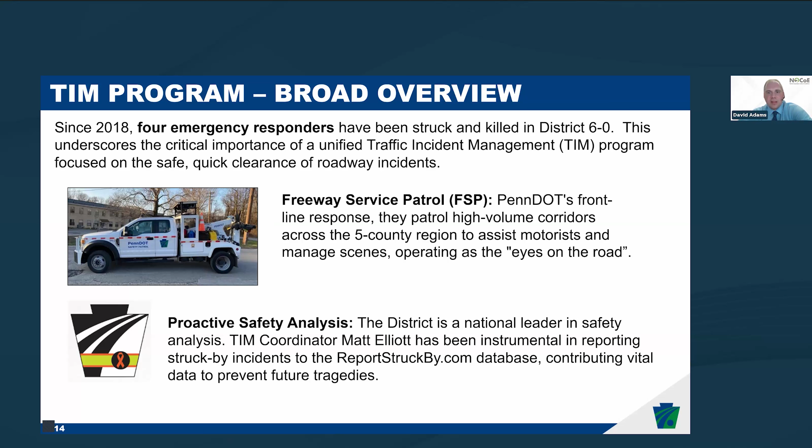In addition, it's important to us to have proactive safety analysis. We consider ourselves kind of a leader. One of the guys from our office, Matt Elliott, he's been instrumental in reporting struck-by incidents to the database in an effort to document and help prevent future tragedies. Next, please.

A few of our initiatives. We have a lot of statewide and regional collaboration, including the statewide PennTIME Committee, and then regional TIM meetings, typically done by county and led by DVRPC, which is our local MPO in the Philadelphia area. In addition, technology is important to us as well, including the HAAS technology. And then also, from a sustaining perspective statewide, having active participation and commitment from a lot of our partners. It's important for us to all work well together, and we're fortunate to have that here. Next, please.

So in terms of training, we've had 94 TIM classes. There were 3,000 responders just here in District 6 since 2019, and included also targeted training for our RTMC and freeway service patrol operators. So they're educated as well. And then a number of different technologies in use, UAS, and then also digital photogrammetry to clear crash scenes for investigations quicker.

Also public outreach, including Pennsylvania's Move Over law and distracted driving awareness through public events, and then also encouraging the 511 PA system. It's common for us to have press conferences with district leadership and our press team to get the word out there to improve highway safety. Next, please.

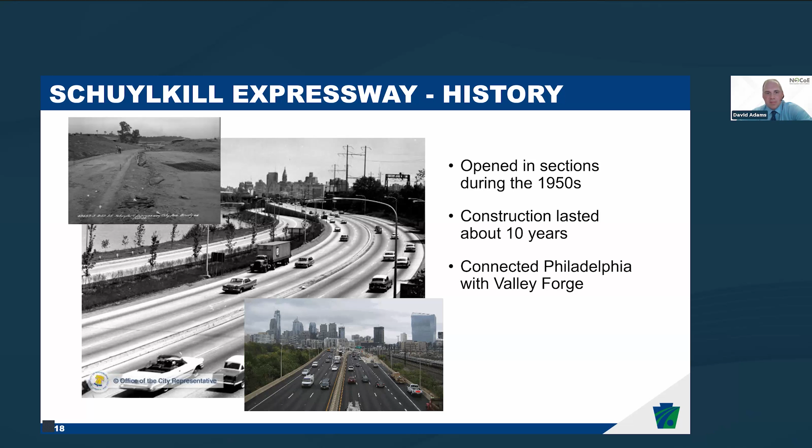So we are constrained on both sides. It's a challenging situation. You have steep cliffs on one side and the Schuylkill River on the other, which makes it very difficult for any type of expansion effort. So it ends up being a natural bottleneck.

In addition, since it was built in the 50s, the King of Prussia area has really expanded. We have the King of Prussia Mall, which is one of the largest malls in the country. It's a very big commercial center, in addition to completion of 476, which we call locally the Blue Route, along the western edge of the suburbs. So from a transportation perspective, it's a very high demand corridor, and the constraints limit our options. So we've turned to different things like ITS technologies, which we'll walk through here. Next, please.

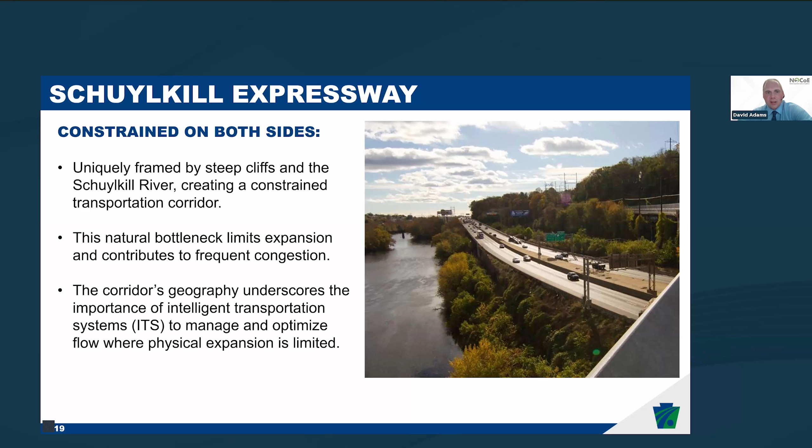We have over 500 cameras in the Philly area, plus over 200 message boards. We have a really nice room for our incident command center. So a very good place and plenty of room for expansion too in the future. Next, please.

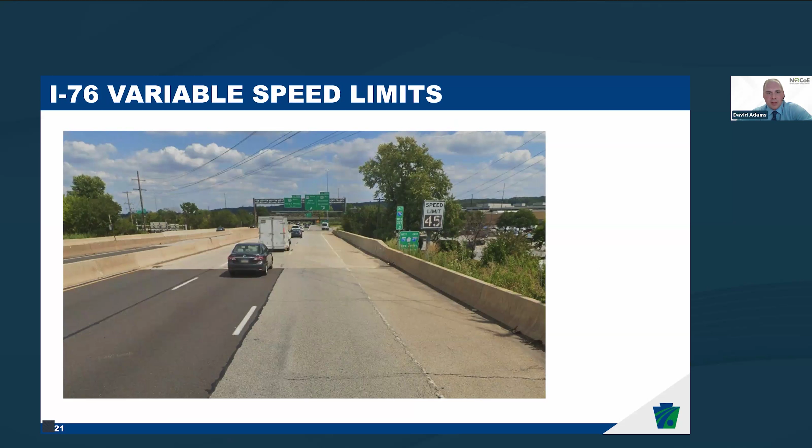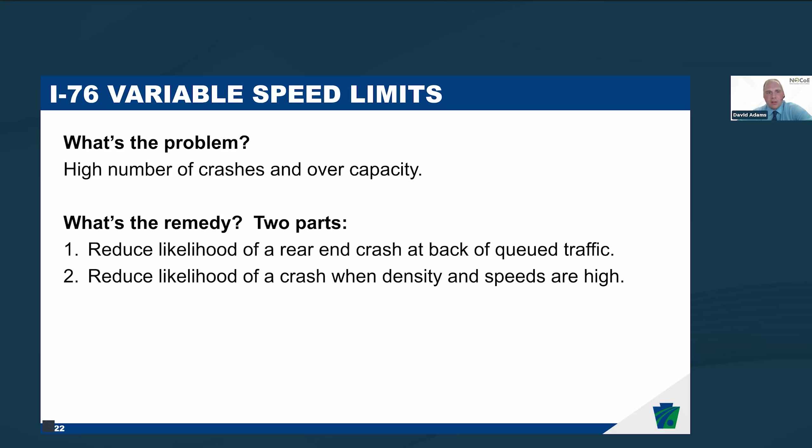So what's the problem? High number of crashes and overcapacity. So what's the remedy? In terms of variable speed limits, it's two parts. One, we wanted to reduce the likelihood of a rear-end crash at the back of the traffic queue. And two, reduce the likelihood of a crash when you have a situation with high density and very high speed, which I'll walk through. Next, please.

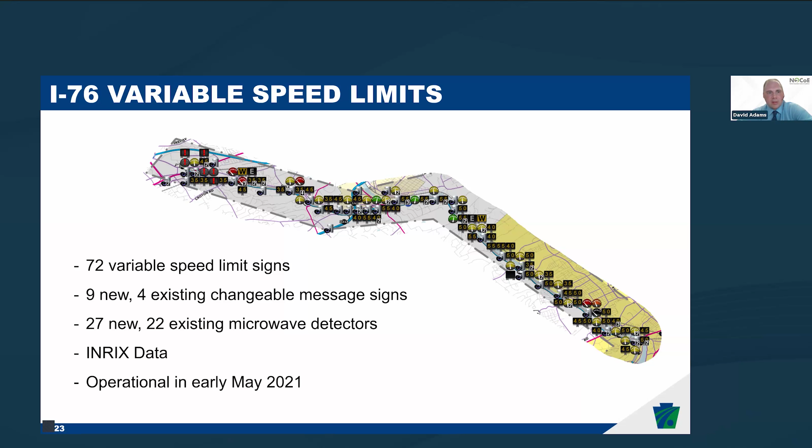So we really needed microwave detectors here, because for this type of system where we want to know exactly what's happening all the time, you have to actually have a detector out there, since there's a bit of a delay in grabbing crowdsourced data. That's why it was important to have microwave detectors instead of just relying on the crowdsourced data.

The maximum speed in Montgomery County is 55 miles per hour, and when you hit the city limits, it turns into 50 miles per hour. We don't allow more than a 10 mile per hour step drop in speed limit between variable speed limit signs. It's run fully automated. We can run it manually or semi-autonomously if we have to, but we allow it to automate 24/7.

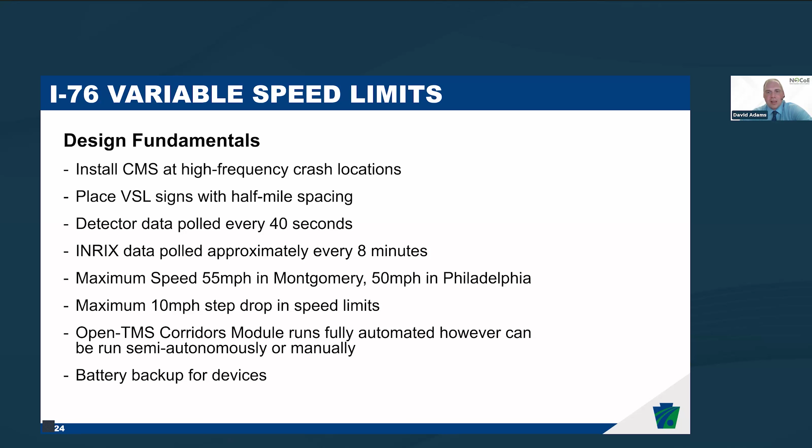One lesson learned: when you have a winter storm and want to limit the top end speed, suppose we do a speed restriction on all interstates of 45 miles per hour, you need that functionality in your system to change the ceiling speed so it fluctuates between 35 and 45 instead of 35 and 55. That was an enhancement we had to add after the fact. And we have battery backup for the devices. Next, please.

Okay, so I talked about the two ways we try to tackle this. One was high density and high speed. Studies have shown, and it's intuitive as a driver too, if you have very dense traffic at very high speeds, the likelihood of a crash greatly increases. So we use a flow crash potential index, detecting the speeds and density of traffic, to find out when we need to start dropping the speed limit based on the FCPI. So that's one component. Next, please.

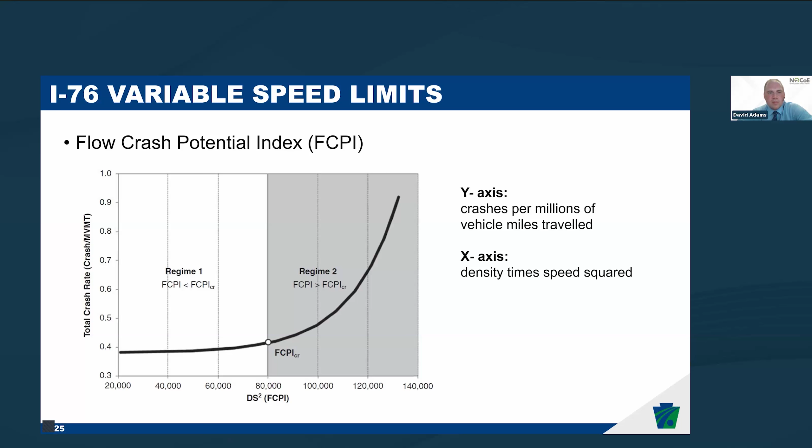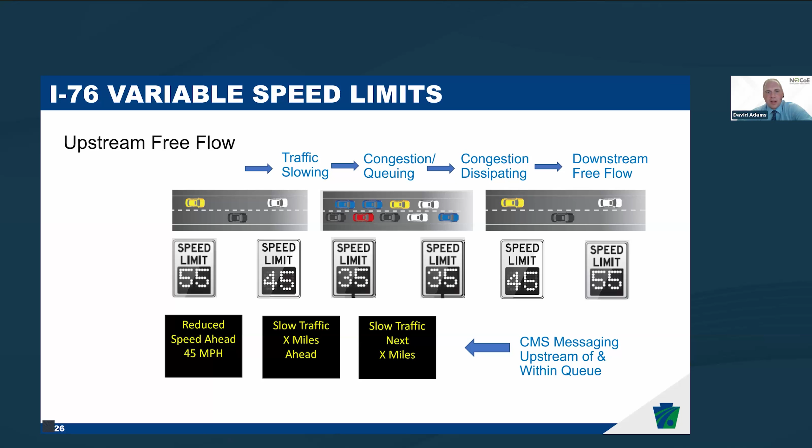So as a driver, one of the great benefits of it is when you start seeing that speed slowing down on the signs, whether it's 45 or 35, you could intuit that something's going on up ahead. Whereas if it's 55, you've got a good amount of confidence that traffic's running free flow. So that's definitely one of the benefits to the system. Next, please.

And this is just kind of an animation. You could see what it looks like on our ATMS software. We have this dashboard that'll show the data coming in terms of speeds, and then also what we're posting on every sign out in the street. And then at the bottom there, you could see a representation of speeds, traffic, whether it's yellow or red based on speeds. Next, please.

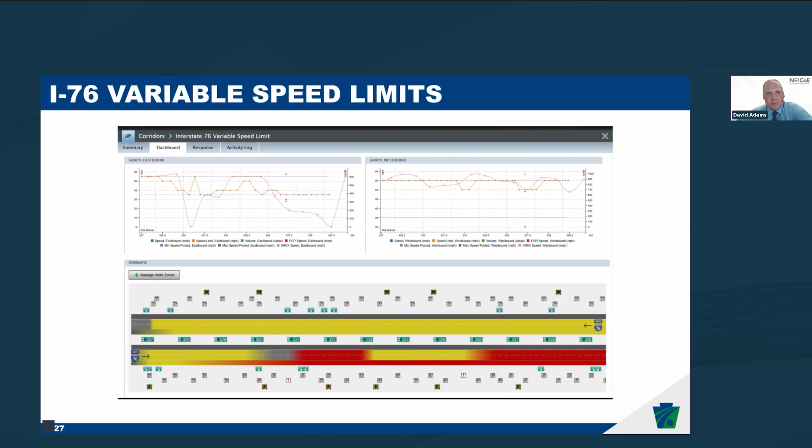So in terms of how it's performed, we went live May of '21, as I'd mentioned. There were kind of two analyses we did. One was looking at initial data in 2021 when it had turned on, because we started getting questions about how it's doing. It was too early to really give conclusions at that point because we were just looking at the data in the months after it was turned on. But we did start to see reductions month by month in crashes after it was turned on. But we definitely qualified that by saying we don't have a couple years of data yet.

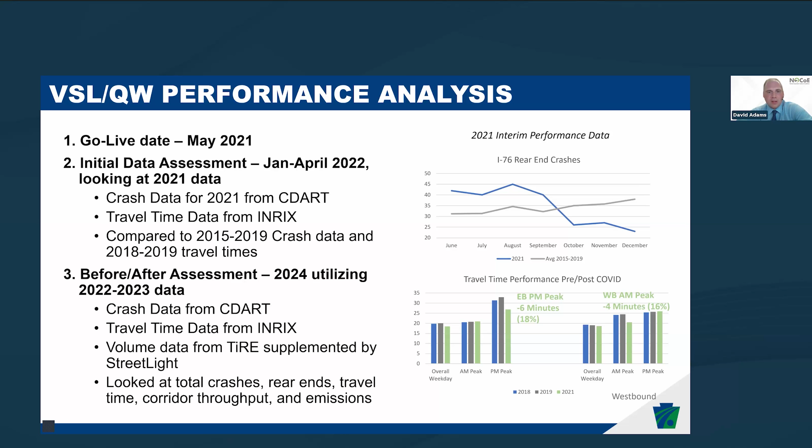But we did do an assessment in 2024. We looked at 2022 and 2023 data and compared it to pre-COVID, because we didn't want to compare it to 2020 and early 2021, when traffic patterns were definitely different because of COVID. So next, please.

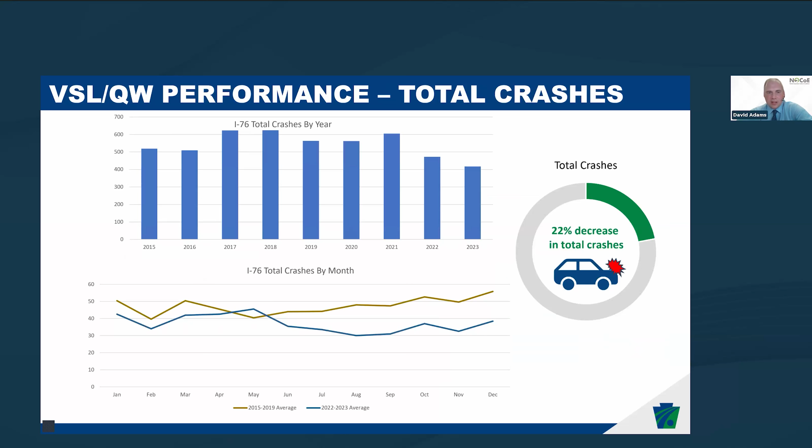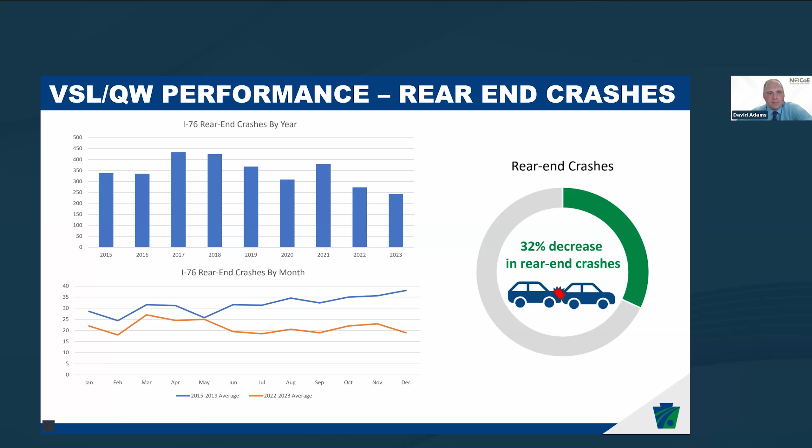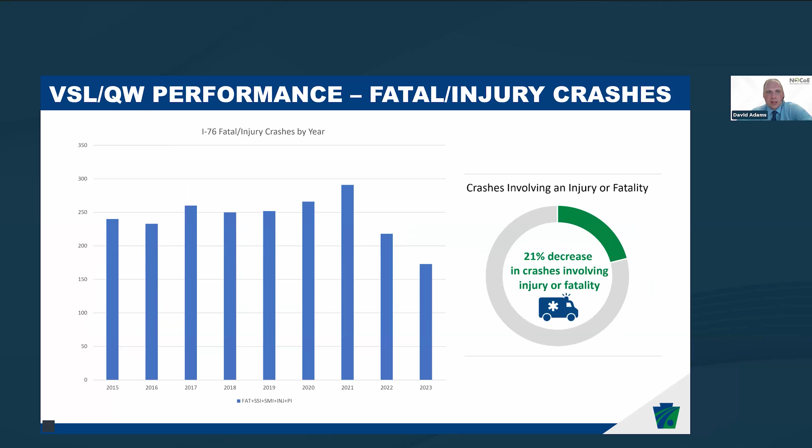So in a couple of the results, we had a 22% decrease in total crashes after the VSL was turned on in studying those 2 years versus the years prior to COVID. Next, please. And then a 32% decrease in rear end crashes. Next, please. And then a 21% decrease in crashes involving injury or fatality. These were definitely positive numbers and showed really good results for the system. Next, please.

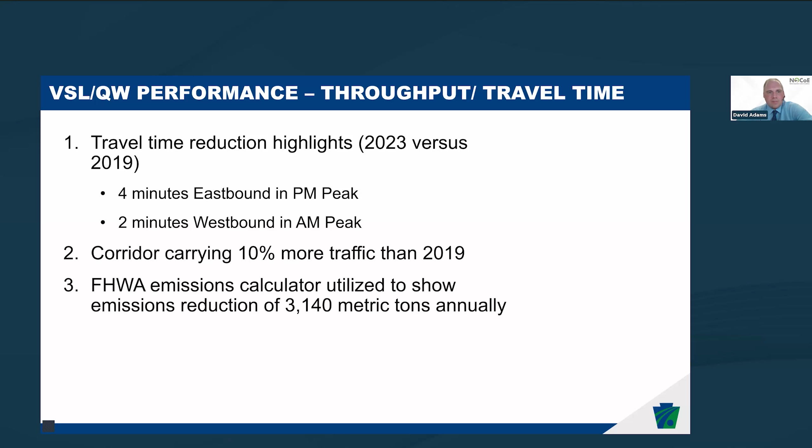So as I mentioned before, just to give you a bigger perspective, in the 76 corridor we're very constrained. So there's kind of a menu of things we've been doing to try to improve the corridor. Another big part of it was improving traffic signals parallel to the corridor. Historically in Pennsylvania, the municipalities owned and maintained the signals, but we had legislation that enabled us, as a state, to take over ownership of signals on corridors. This was the pilot, to take over corridors parallel to 76, and through improved maintenance, operations and equipment, help travel through this entire corridor. Next, please.

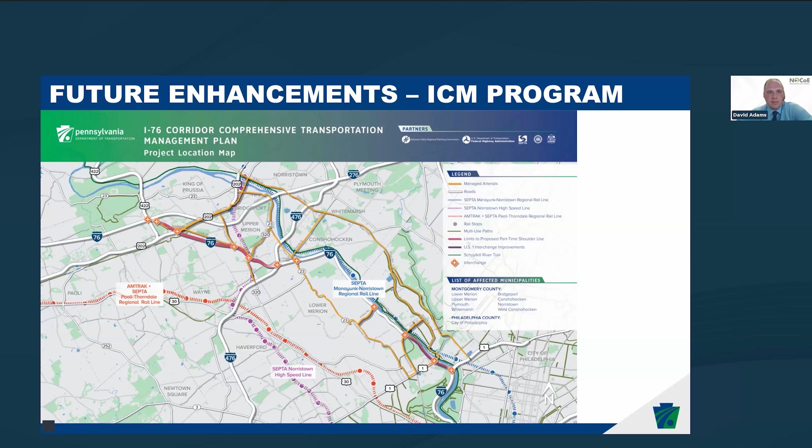And this gives a list of different things we had looked at and considered, with the part-time shoulder use being one of the bigger ones. Next, please.

So the flex lanes are also known as part-time shoulder use. What we plan to do is build out the shoulders on either side to be able to add a third lane on the 76 corridor. We're looking at another 4 or 5 years yet, but the project's in design. This will definitely be a game changer. We would probably have the third lane open all day, but possibly close it at night. If there was a crash in the left lane, for instance, we could close the left lane in advance of the crash, or the left 2 lanes if need be, using these lane use control signals. So it'll definitely be a game changer. Next, please.

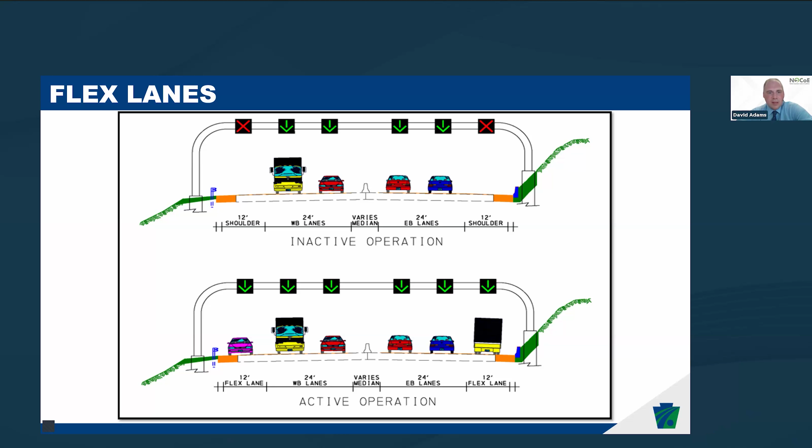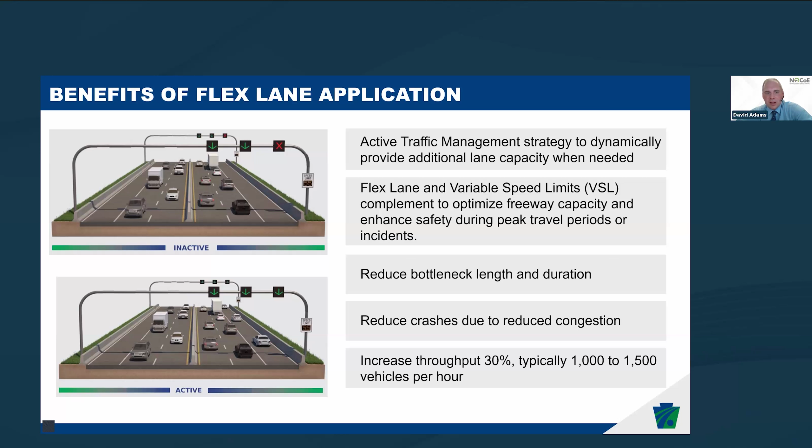And a few of the benefits, as I mentioned, to dynamically provide additional capacity. It could work in concert with the variable speed limits so both of them improve traffic. And also, the reduced congestion hopefully will reduce crashes as well. And it'll increase throughput as well on the 76 corridor. Next, please.

And this is the program schedule. Again, we're still a ways off before we get to construction for the flex lanes. There's 2 sections, FL1 and FL3. One's up near King of Prussia, the other is closer to the city, and then there's a second section yet that's in the middle, FL2. That's probably the bigger lift, I'd say. That one, it's still a ways off. We haven't gotten in design yet for that one. Next, please.

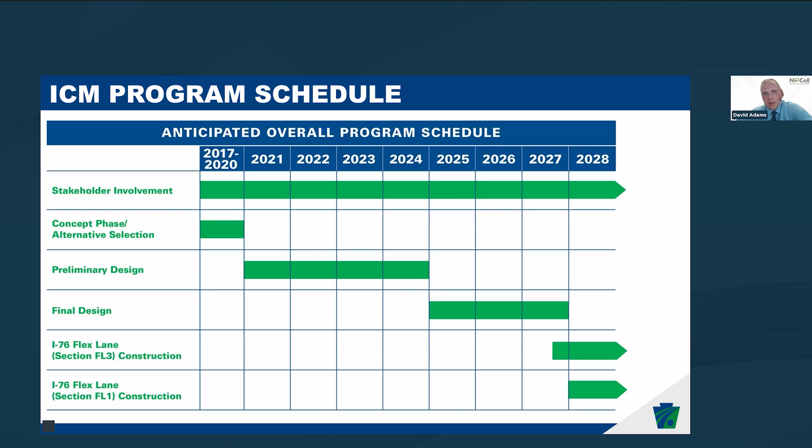And I think we'll go to the next slide and do some Q&A. There's been a lot of questions in the Q&A box as well as the chat. So I will put on my Jim Austrich hat and start, Michael, with the very first easy question to you. I think that was from Joseph Haynes, who's in the towing and recovery industry. Does TRIP, the Towing Recovery Incentive Program, cover the Ohio Turnpike in terms of its coverage area?

It doesn't cover the turnpike. Yeah, with that just kind of being its own entity, we don't have cameras and stuff on there that we can access from our traffic management center as well. So we don't have it set up for that. Okay, easy yes or no answer.

Very good. And you went into a lot with regard to the TRIP and its contract. So curious, what, if anything, has changed during the nearly decade that the TRIP program has been in place, whether it be in terms of response times, compensation, activation criteria, or any other aspects? Could you touch on that?